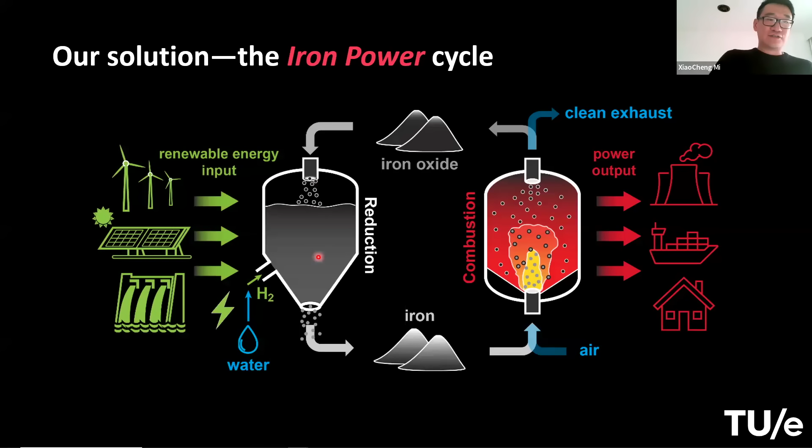So what is this idea about? You can burn iron powder - particles of tens of microns in size. You burn them in air, and the combustion releases heat, which can be used for power generation, electricity generation, or just as heat itself. The combustion doesn't release any CO2 because there's no carbon involved. After combustion, you can recycle the iron oxide powder, also as micron-sized particles, and keep them. You can transport them to somewhere with easy and cheap access to renewable energy input. With this renewable energy input, you can, for example, electrolyze water to generate hydrogen or directly use electricity to reduce iron oxide back to iron. So in this way, you store renewable energy as iron powder and transport it back to the end users. That's the idea.

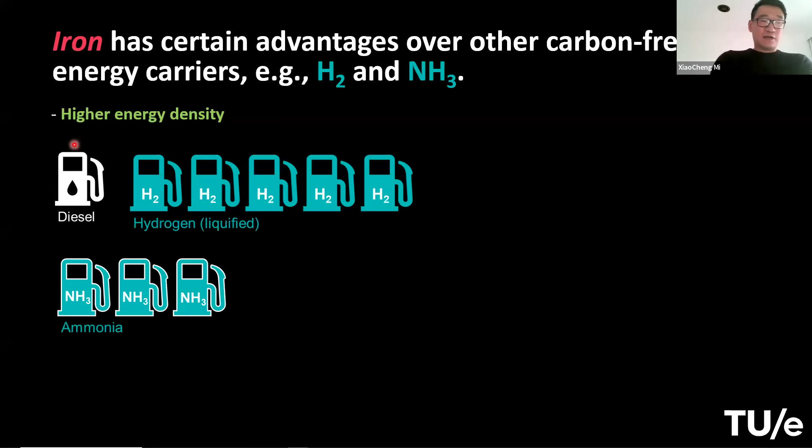Why iron? We see several advantages of iron over other currently developed energy carriers, for example hydrogen and ammonia. First, iron has a high energy density. This schematic shows that if you want to contain a certain amount of energy in one container of diesel, you'd need 5 times more volume of hydrogen, even liquefied compressed hydrogen. Ammonia is better because you pack hydrogen into this molecule with a nitrogen atom, but the volumetric energy density still isn't as good as conventional fossil fuels. Iron has a much better energy density by volume - it takes even less volume than conventional diesel to contain the same amount of energy.

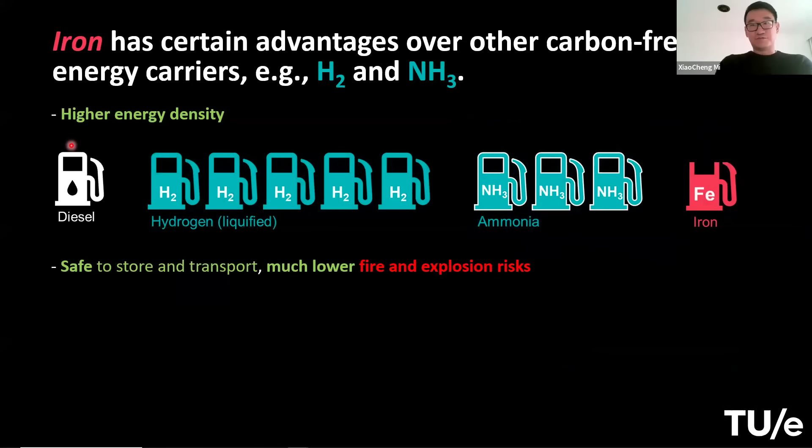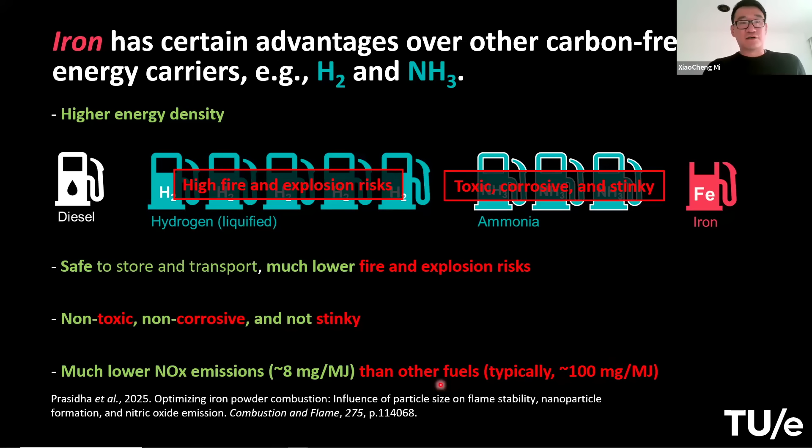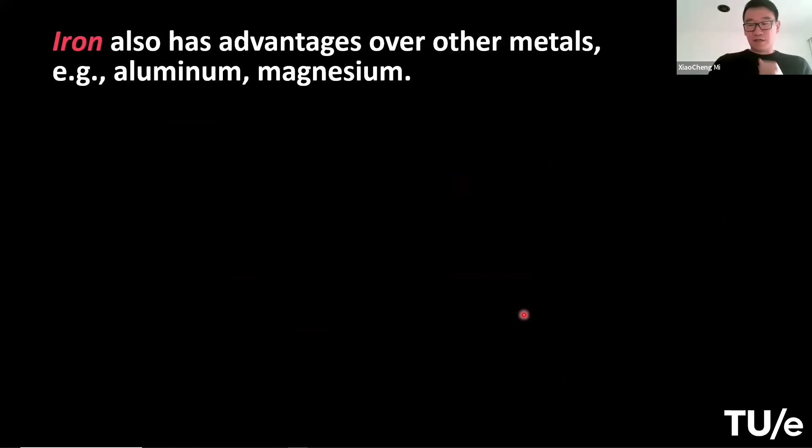And why iron, not other metals? Nowadays, there are also people studying other metals like aluminum or magnesium for energy storage, which are good, but iron has certain advantages.

The first is that iron combustion is non-volatile. This means the combustion temperature of iron is lower than the boiling point of itself and also its oxide. This means during the combustion process, the particle remains in condensed phase, first in solid phase and later in liquid phase.

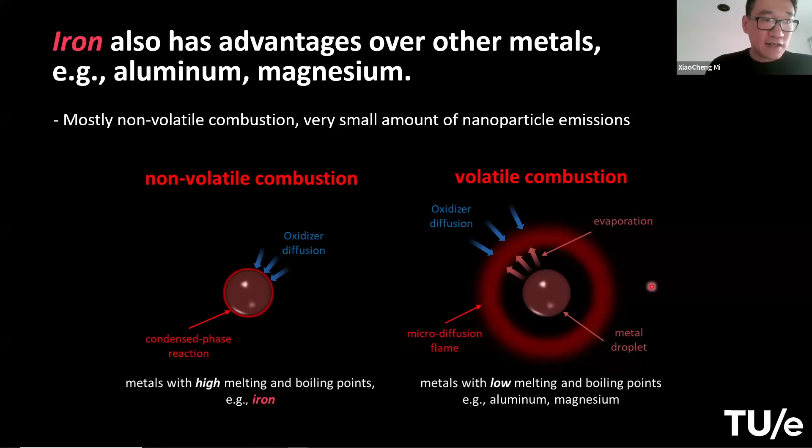Aluminum or magnesium have relatively low melting and boiling points. During combustion, the particle temperature can go above the boiling point, causing a lot of evaporation, with most oxidation happening in vapor phase. This forms a lot of nanoparticles, which are harder to capture and recycle.

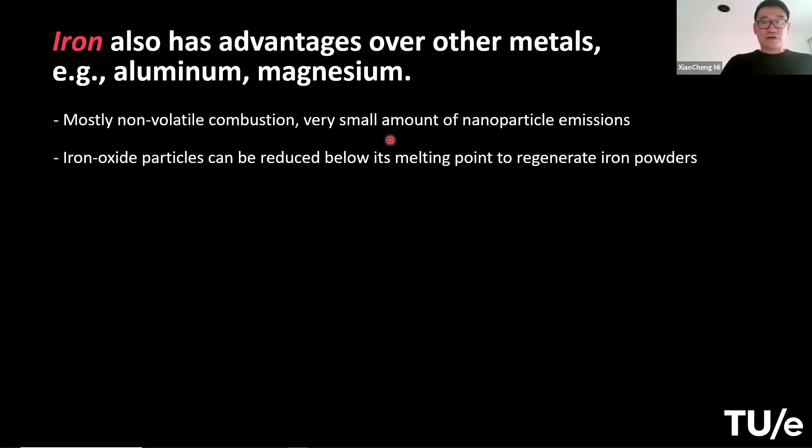So iron has the advantage of non-volatile combustion and small nanoparticle emissions. The other advantage is iron oxide after combustion can be reduced back to iron below the melting point, either in solid phase or in a dissolved solution. These are the two technologies our group is developing.

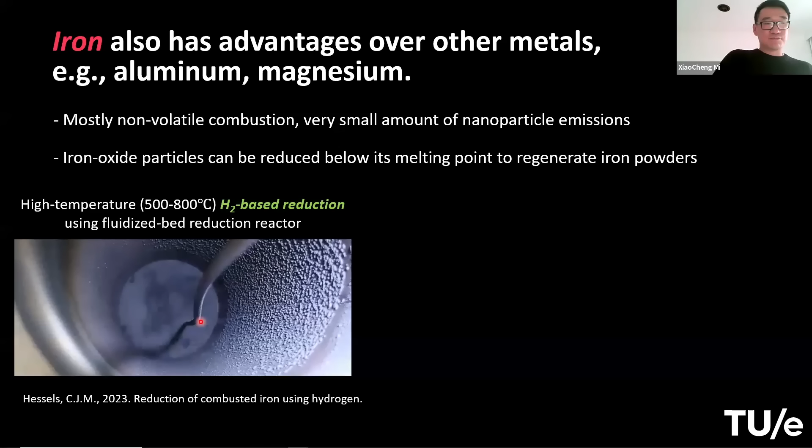One is using a relatively high temperature hydrogen-based reduction using a fluidized bed to reduce iron oxide back to iron. What you're seeing here is a top view of a fluidized bed. This bubbly feature is hydrogen gas passing through the bed. This way, you can reduce iron oxide back to iron.

Another way is direct electrolysis, where we directly use electricity. You apply voltage over an electrolyte, an alkaline solution. You dissolve your iron oxide in there, and the iron can be deposited on the cathode surface. This way, you can achieve much lower temperature electrolysis, even below 110 degrees Celsius.

This may sound a little provocative if you're working on hydrogen or ammonia, but that's not the message I'm trying to send. We can calm down and look at some fascinating phenomena of iron combustion.

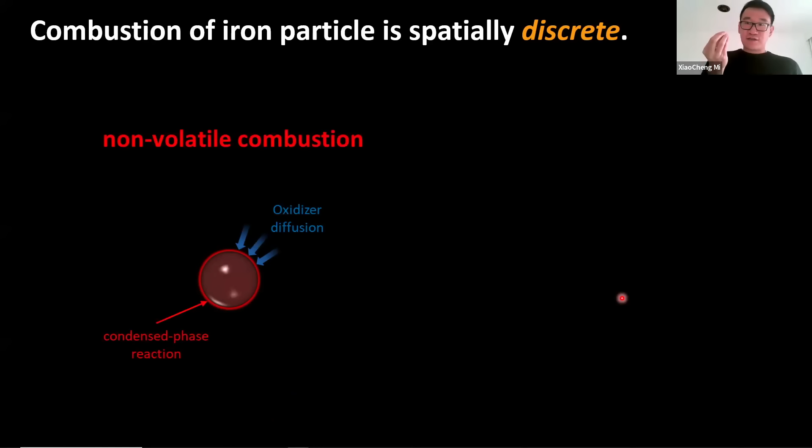The first is discrete combustion, because as I mentioned, iron combustion is non-volatile. This means each particle is like a discrete energy source in space. If one particle releases energy, the heat takes time to propagate to reach its neighbor, and in this way the flame or combustion reaction front can propagate.

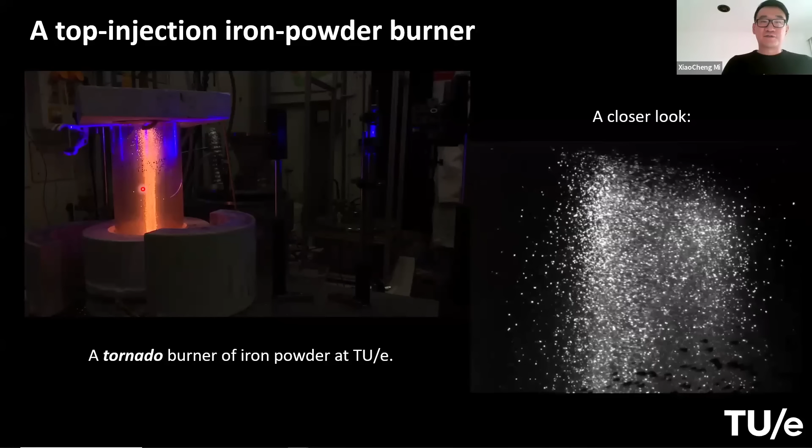The later idea is the top injection iron powder burner. You inject iron powder from the top, and there's a swirl generator on top of this burner, making a swirl inside this cylindrical chamber so the iron powder moves in a tornado motion, which you can see here. This way, the residence time of the iron particles increases, giving them enough time to combust and release heat to ignite the later injected particles, so you can maintain the flame without any other fuels.

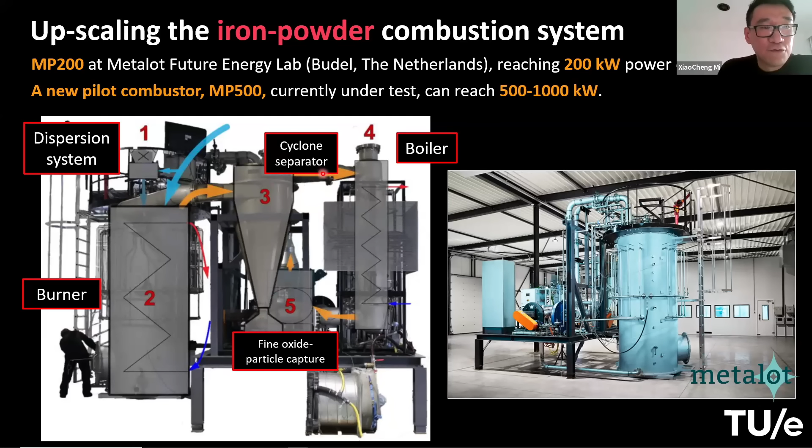Some of the powder will be taken by the flue gas, so you need a secondary separation, the cyclone separator. Due to the centrifugal force inside it, you can further remove iron oxide particles from it. The flue gas then goes through a secondary heat exchanger to extract the heat from it.

And this is a closer look of what is inside this industrial burner. Basically, the particles are injected downward with the gas, with air, combusted, and the particle can settle down on the bottom. There's also a heat exchanging system on the bottom surface to remove heat or keep the particles cool so they do not sinter.

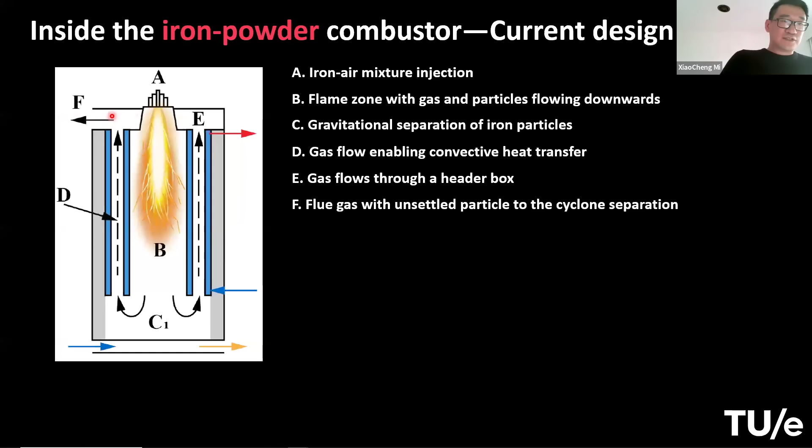And the gas can flow back through these channels where there is a water cooling system. So you heat up, you exchange heat with this system, and the gas goes up, and then you eventually go into this exit into the cyclone.

So far, if you search the literature, there are already quite a few papers on iron combustion published, but the only published document on industrial burners actually recently became available online. It's the thesis of one of our group's PhD students, Niek van Rooij. He published this thesis, which is mainly on industrial scale burners, not the lab size. So if you want to know about the state of the art of this, please have a look at his thesis.

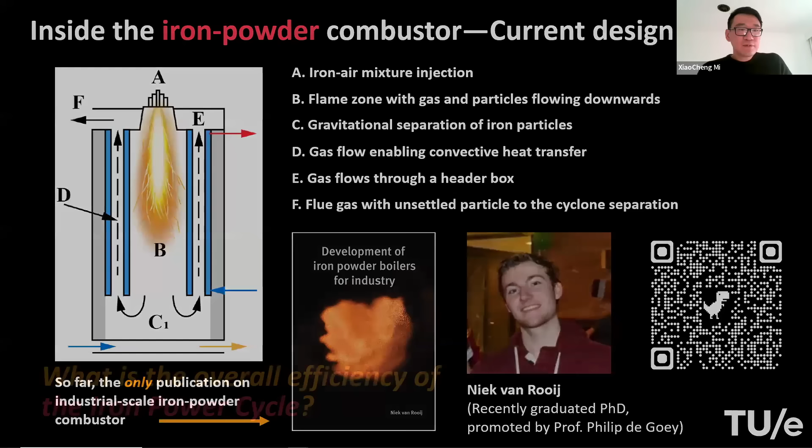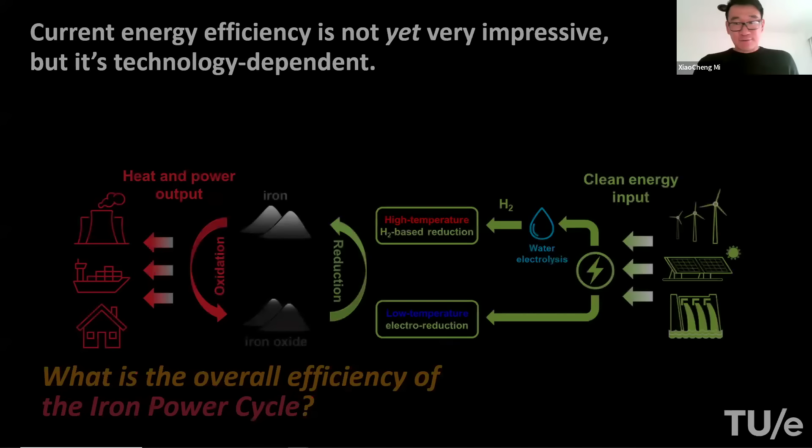So up to this point, you may start to wonder, okay, you said a lot of good things about this iron power cycle. What is the overall energy efficiency, right? To be honest with you, so far this energy efficiency is not yet very impressive, but this is technology dependent.

So let's look at it part by part. For this hydrogen-based high temperature reduction, the energy efficiency is not very good because you need to go through two steps. You need to first do water electrolysis to generate hydrogen, and then you do hydrogen reduction at high temperature, which requires heating up the system. So the electricity to chemical energy stored into iron powder is around 40%.

But this has a relatively higher TRL, meaning we are already working on the upscaling of the technology. There's a better way of directly using electricity, as I mentioned in the previous slide. This one can reach Faraday efficiency, meaning the electricity energy to iron deposition is almost 90%. This is already demonstrated in our lab, but the TRL is relatively low because we are still working on the lab scale reactor, not at the industrial scale.

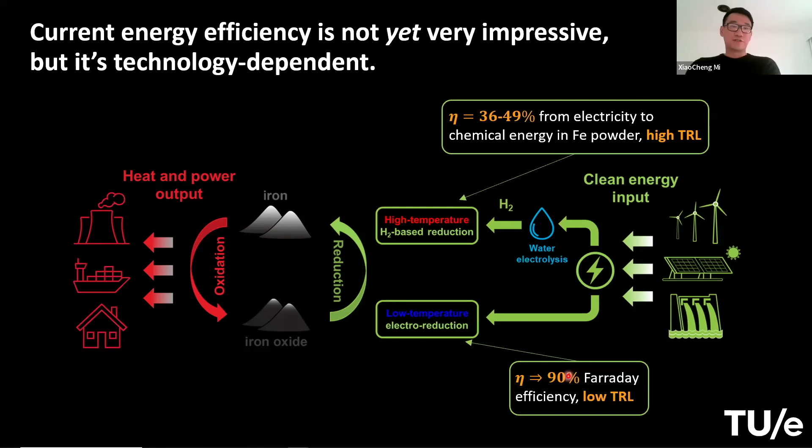But as a combustion scientist, I care about the combustion side. Theoretically, if you burn a fuel, you can fully burn it—it can all go into heat. Thermodynamics allows us to do that. However, as you can find in Niek's PhD thesis, so far, depending on the conditions, the iron chemical energy to heat efficiency varies from 50 to 80%. Not ideal, but theoretically we should be able to extract 100% of this amount of energy as heat.

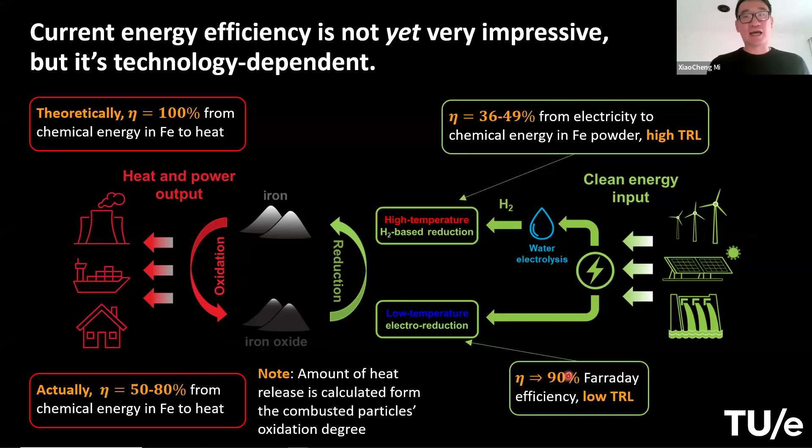Please note this efficiency is calculated based on the oxidation degree of the material we collect after combustion, so the lack of efficiency is not due to the technology of the heat exchanger. This makes us wonder why the oxidation degree so far is so low in this technology, and how can we improve it? As scientists, maybe not so engineering-minded, I want to think about the fundamentals.

So can all the particles injected into the chamber be ignited? And if the particle can be ignited, can they burn out? Can they reach the maximum oxidation degree or not? Let's first think about the first question.

To investigate that, we did some tests with our lab scale tornado burner, and this time we use relatively large particles. The particle size you can see from this SEM image is around 100 microns, and the particles we use are irregular. These are some magnetite ores that we took from a mining company, and then we use hydrogen to reduce them to metallic iron. This is a closer look—you see the iron particle is not smooth, not spherical, and also looks porous because of the hydrogen reduction.

If you burn these particles and the particle can be ignited successfully, it will go into liquid phase. Because of surface tension in liquid phase, the product particle will look very spherical, like this one. But you can see in the product particles, a lot of particles are still irregular, which is overall similar to the unignited, uncombusted particles. This means that in these combusted particles, there is still a large portion that fail to be ignited because they look irregular - they have never been into liquid phase.

This is consistent with the X-ray diffraction measurement. You see a lot of irregular particles, and indeed, there is still a large portion of iron remaining in the product particles.

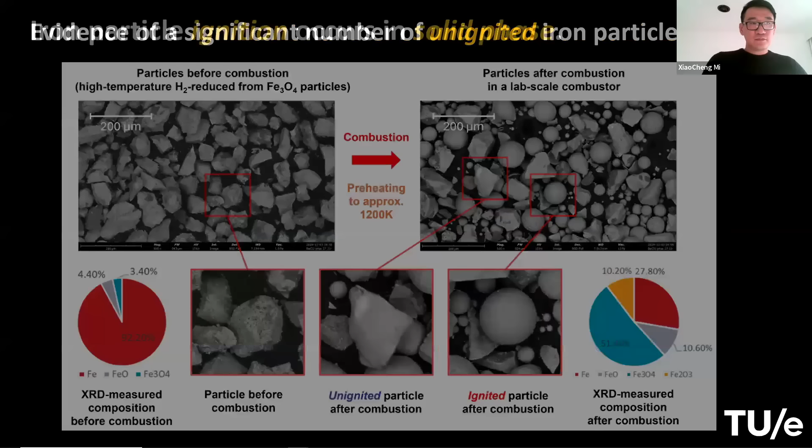This leads us to the thought that this ignition phenomena must occur in solid phase. The critical phenomena depends on the solid phase oxidation. Then we need to look at some basics about solid phase iron oxidation.

In solid phase, iron can be oxidized to 3 different species. The lowest one is FeO, or what we call wuestite. The intermediate one is magnetite. And then the most oxidized form is hematite, Fe2O3.

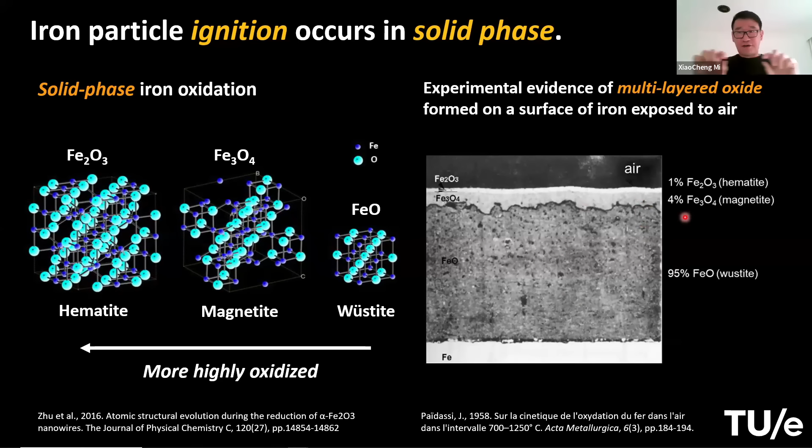This is a picture taken from a metallurgy study back in the 1950s. It shows the oxide layer that grows on top of an iron surface, exposed to air, which is an oxidizing gas. You see that nearly 95% of this oxide layer is wuestite, FeO. Then there is a thinner layer of magnetite, and a very, very thin layer on top, which is Fe2O3, hematite.

Because of this multi-layer formation of iron oxide, its growth rate actually depends on the iron ion diffusion rate through the oxide layer. So how fast it grows depends on how fast iron ions, Fe2-plus or Fe3-plus, transport across these two thicker layers. Of course, the thickest one, or the most dominating one, is the FeO layer.

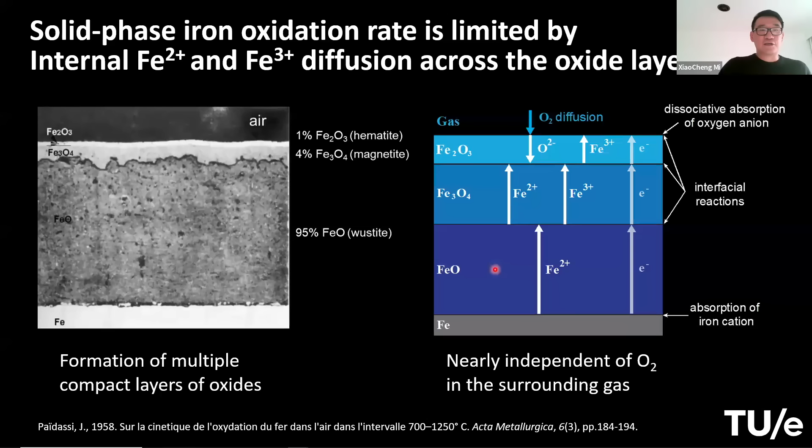If this internal diffusion is the rate limiting mechanism, then we can actually come up with a reaction rate model to describe it. The diffusion is mainly described by Fick's law, which we also know from heat and mass transfer that we study for gas phase combustion.

This Fick's law depends on the difference of concentration over the thickness of the oxide layer. Basically, this is the gradient of the concentration of the ion across the oxide layer. So it depends on the difference and inversely depends on the thickness of the oxide layer. The growth rate of the oxide layer depends on the diffusivity times area, and the gradient of concentration. This can be written in this form.

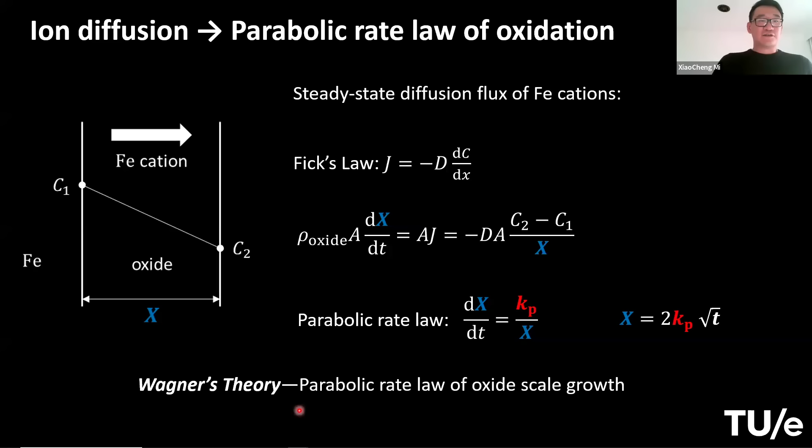The derivative of oxide layer thickness with respect to time equals some parabolic rate law constant Kp divided by the thickness of the oxide layer. This Kp is actually based on the diffusivity of the ion across this oxide layer. This is known as Wagner's theory, which gives rise to the parabolic rate law of oxide layer growth.

This Kp can be measured by fitting straight lines to the oxide layer growth over time at different temperatures. It follows a certain Arrhenius form, which has the activation energy and also some pre-exponential factor, similar to gas phase reaction kinetics, because this is an activated process.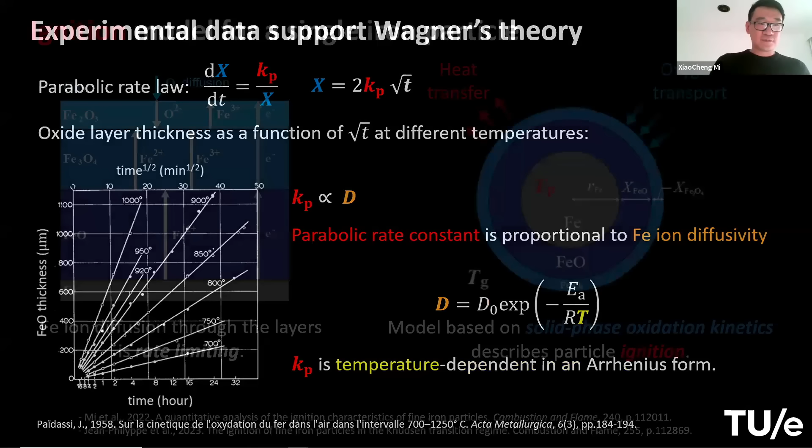By knowing such an oxidation rate in solid phase, we can actually build a model to simulate the ignition process of an iron particle. We can build such a model by assuming this oxide layer is wrapping around a spherical particle. The growth rate depends on the parabolic rate law that we can get from the literature, using experimental data to calibrate that. Then we can build a mass and heat balance model for this spherical particle system.

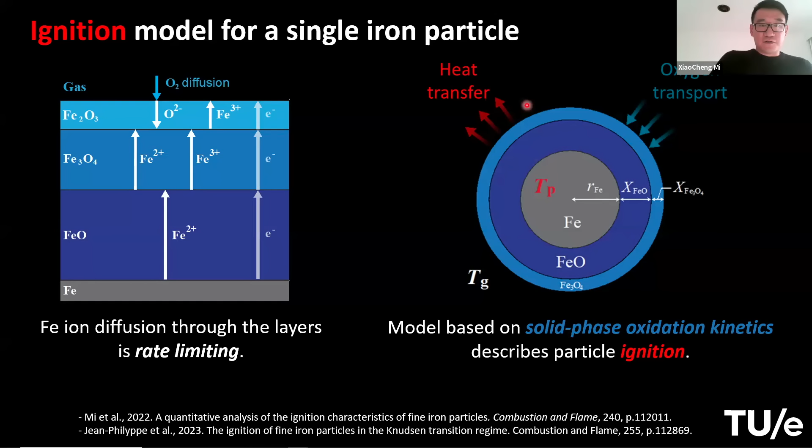If you change your gas temperature from a small value and gradually increase it beyond some critical value, you can trigger particle thermal runaway. This minimum temperature of the gas that can trigger particle thermal runaway is determined as the ignition temperature. So by running this simulation, running the model in multiple ways with different gas temperatures, we can determine ignition temperature theoretically.

Here are some results. This is the ignition temperature as a function of particle size. The different curves show the result for different initial oxide layer thickness. You can see that the ignition temperature is highly dependent on the initial oxide thickness. With a relatively large initial thickness, it requires a higher ignition temperature to trigger thermal runaway. Radiative heat transfer to the surrounding doesn't have a very major effect on the ignition temperature.

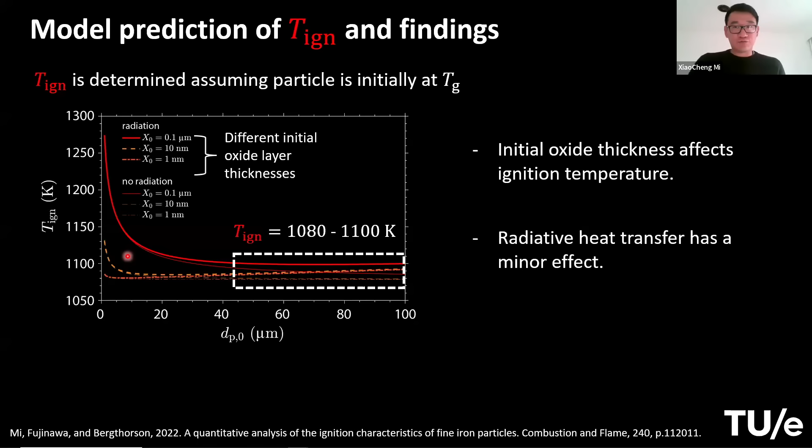In these cases, we assume that the particle's initial temperature is the same as the gas temperature. So if the particle is injected into the chamber at room temperature, it would require a higher ignition temperature, which I'm going to show later in the slide.

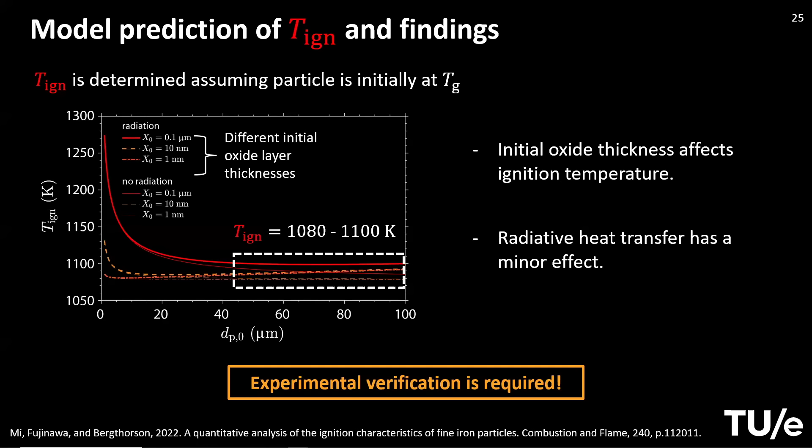Okay, sorry. Okay, yeah, no worries.

Okay, I will continue. So this is a theoretical prediction, and we need experimental verification.

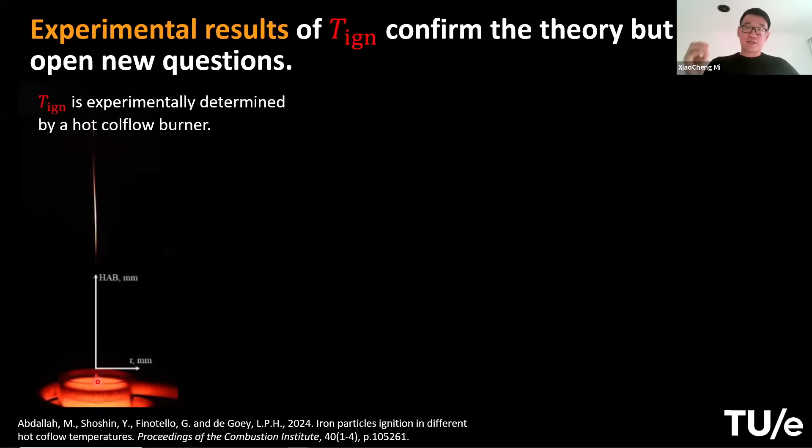So what I'm showing here on the left is an experiment also done in our group at TU Eindhoven. It's a single particle ignition experiment. You can inject single particles into this middle tube, which is a very thin ceramic tube. Around it, this larger tube is a hot coflow, so you can use electric heating elements to heat up the coflow gas that has oxygen in there, and you can control the temperature of the coflow gas. In this way, you can determine the particle's ignition probability at different temperatures.

And here is the result. What you are measuring is you count the number of particles you observe, and if it's ignited, you count it as ignition. After measuring many particles, you get this ignition percentage as a function of coflow temperature. You see this ignition percentage goes from nearly 0 to nearly 100% between 700 and 900 degrees Celsius, over this 200-degree range.

This range seems to envelope what the theoretical prediction is. In this case, I'm comparing it to the case where I assume the particle initially has the same temperature as the gas. This is because the particles are carried with inert gas in this central tube, and before it encounters oxygen, it has already been heated to about the same temperature as the coflow.

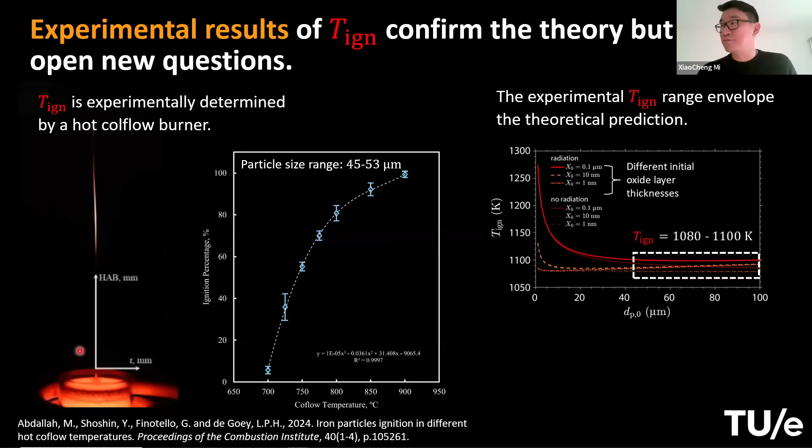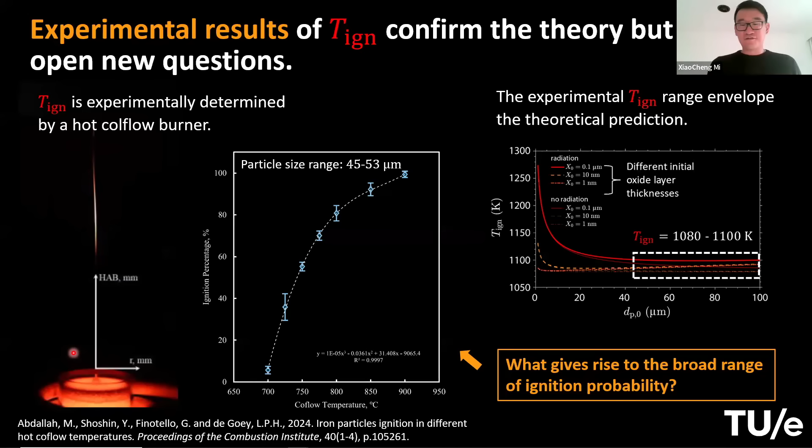But the thing is, theoretically it only tells us there's only one single value of ignition temperature, but experimentally it tells you a large range. So what gave rise to this range of probability? There are multiple factors that we are considering.

First of all, the particles are not spherical, they're irregular and could also be partly porous. Also the particle may contain impurities, which changes its chemical and thermodynamic properties. Of course, the particle may have different initial oxide layer thicknesses.

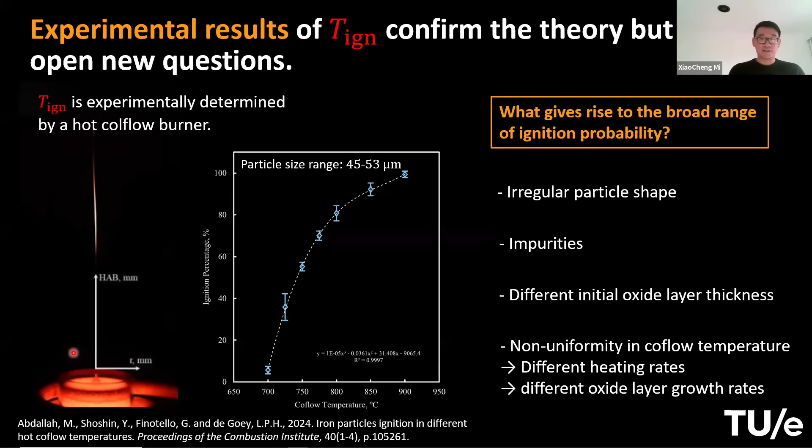And the last one, maybe the most relevant one to the larger scale combustor, is that the coflow heating around the particle might be different. So the particle may experience different heating processes as it goes across this flow field. This I will elaborate further.

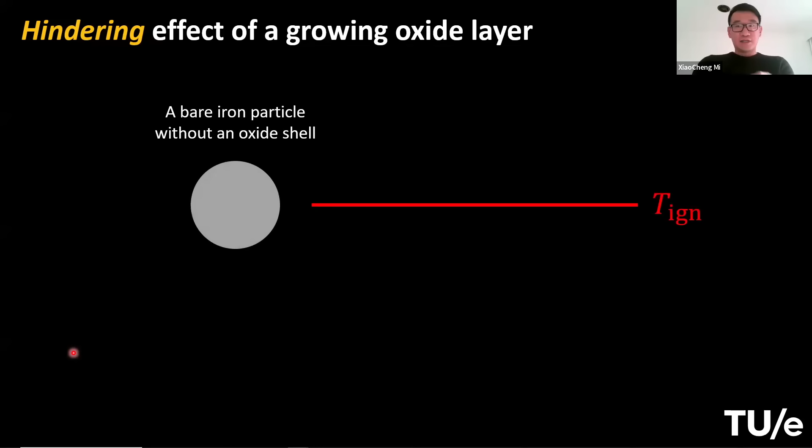So if the particle experiences a different heating process, it may have the following result. Let's say we consider one particle without any oxide layer, and there is a certain ignition temperature that we predict with theory. If the particle encounters a gas temperature greater than this critical ignition temperature, then thermal runaway can happen, and as shown before, the particle can be ignited and burn in liquid phase.

But if the particle encounters a gas that is below this critical value, there's no ignition. And if you keep the particle at this gas temperature, which is already very high but not enough to ignite, the particle can still oxidize, so it will build up an oxide layer.

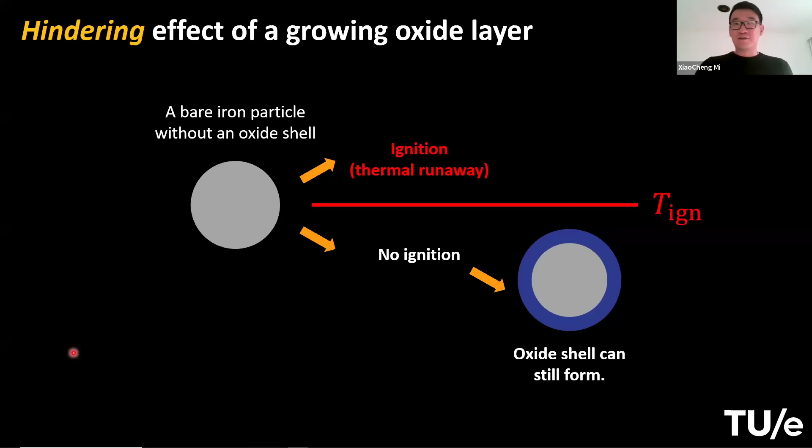And if you recall what I said before, the reaction rate is inversely proportional to the oxide layer thickness. So as the particle builds up a thicker and thicker oxide layer, it becomes even harder to ignite further. After it builds up this thick oxide layer, even if you bring it above the initially required ignition temperature, ignition may not happen.

So there are some studies, experimental and theoretical, on the ignition temperature, but not much study has been done on the effect of the heating rate on the ignition temperature.

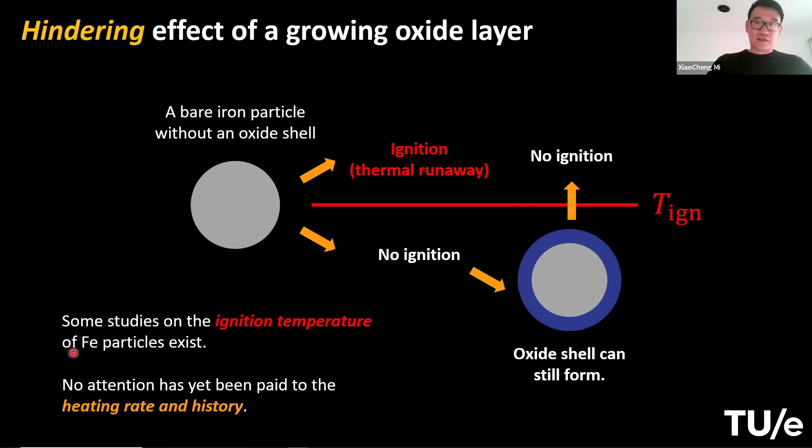I recently did a theoretical analysis, just a thought experiment. Let's say you have a 50 micron particle, initially at room temperature, and then you introduce that to air at 1100 K, which is actually below the critical ignition temperature. So the particle won't be able to ignite.

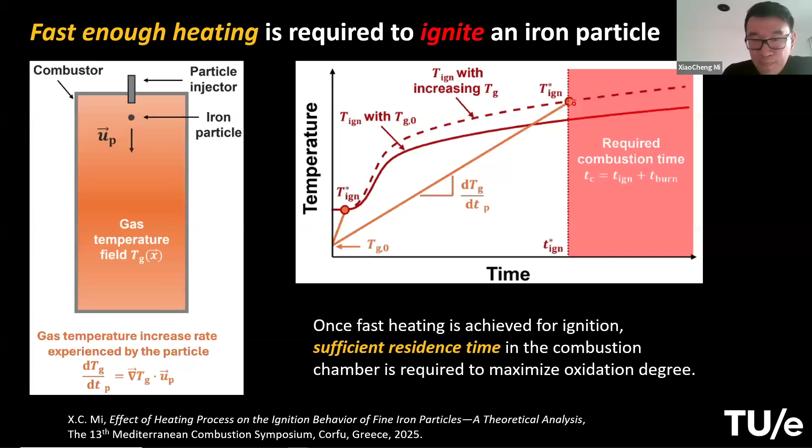So the conclusion is that fast heating is required to achieve ignition. After that, you also need sufficient residence time in the combustion chamber to make sure the particle can complete its oxidation, which is the topic I'm going to talk about a bit later.

We have the hypothesis that this larger pore size can facilitate oxygen penetration into the interior of the particle. In such a way, we increase the reactive surface area that can lead to a lower ignition temperature required. But we are right now doing experimental investigation to verify our hypothesis.

Okay, so that's about the first question - how can we ignite the particles? The second question is, if the particle can be ignited, can we make sure it can fully burn out within the combustion chamber? To know this, we need to think about the liquid phase combustion after ignition.

And this is some basic understanding. We burn these iron particles in our lab burner, and we can collect the product and do some further material characterizations.

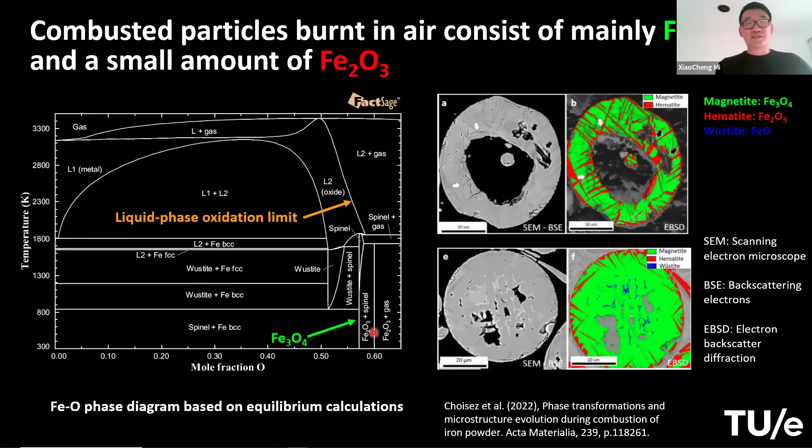And that is why we are seeing Fe3O4 as the main product after combustion. You can see this boundary actually goes a little bit beyond Fe3O4, which means once it cools down, it actually contains more oxygen than the solid phase can hold. This is why we see this kind of cavities formed, because the oxygen needs to be repelled out of it. Only in solid phase, if you keep it warm enough and supply oxygen, it can further oxidize to hematite, the highest oxide product.

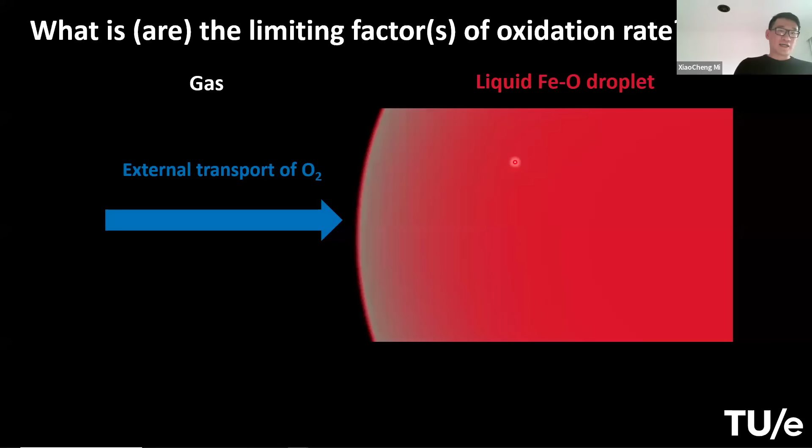And then in liquid phase, we consider the particle might be limited by a few factors, so the oxidation rate is governed by the interplay among these factors. The first is the boundary layer external diffusion of oxygen from the bulk gas to the iron particle surface. Then the surface chemisorption is the second process. And inside the particle, there is also internal transport of Fe and O ions. And of course, there's a reaction between Fe and oxygen.

But we know this oxygen, because in liquid phase they are in ion form, so this reaction is very fast. Also, we assume at this very high temperature, the internal transport and the surface chemisorption can be also very fast. So in the very first model that we have for liquid phase iron combustion, we just assume that external diffusion is the only rate limiting factor.

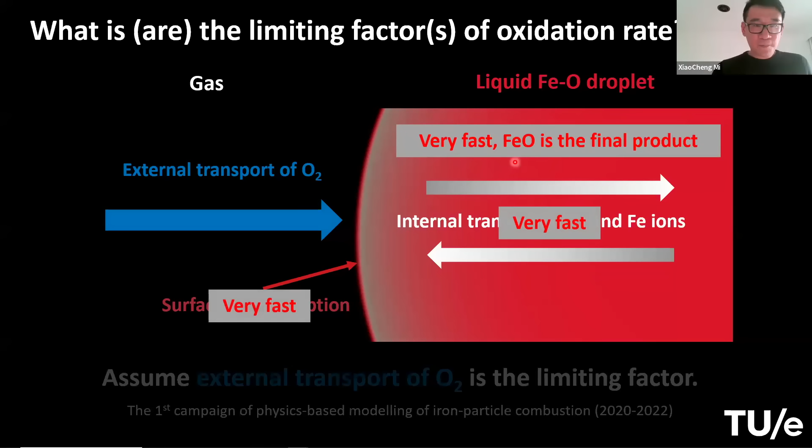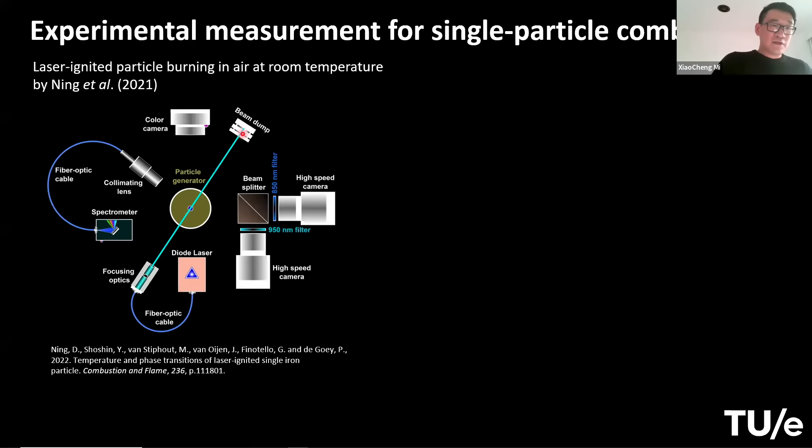And how well this model does, let's see some results. We need to compare the results with some experimental measurement. One experimental measurement is done by our former PhD student Daoguan Ning, using laser ignited particle burning in air at room temperature. This is the top view of the setup. The particle is injected in the center of this setup, ignited by laser, and the temperature is monitored by this two-color pyrometry.

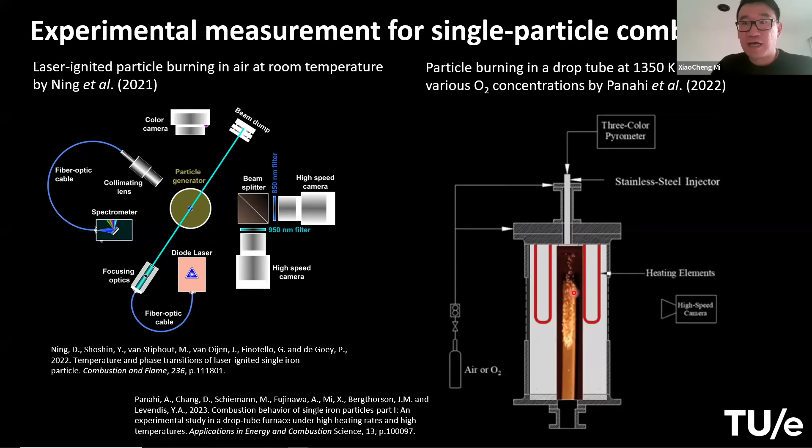And an independent experimental study was done by Panahi in the US. They use this drop tube reactor. The particles are injected from the top going downward. The gas is already hot enough to ignite the particle due to this heating element. And the pyrometry can be looking down from the top to monitor the gas and particle temperature history.

Then the heat and mass transfer in the boundary layer is governed in the continuum regime. On the left, you see this boundary resolved model done by Leon Thijs using COMSOL, compared with the temperature history measured from this laser ignited particle case. You see the overall trend matches pretty well. That means we are able to predict the temperature of the particle and also the time scale of the combustion process.

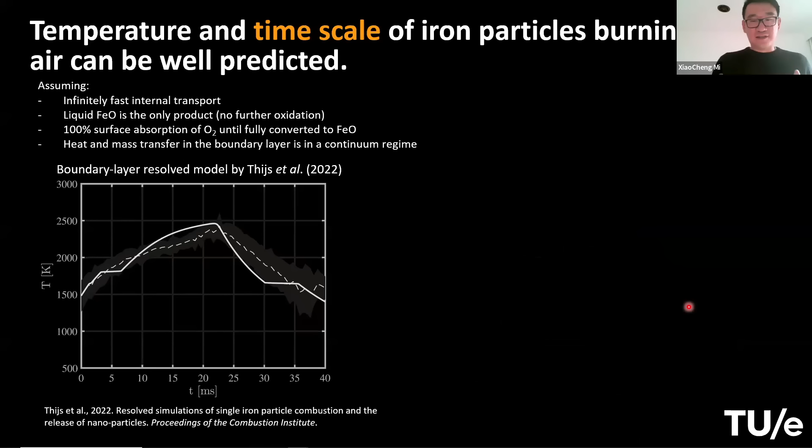And then later, by Aki Fujinawa, we developed this zero-dimensional, even simpler iron particle combustion model, which also matches the result very well, both in time scale and temperature. Of course, at higher oxygen concentrations, the results so far are not yet perfect. For more details, you can look into Leon Thijs' PhD thesis. He looks into what are the effects and how to go beyond these assumptions. So here I won't elaborate on this point.

But we can see that the iron particle combustion times are actually very short. From Dao Guanning's result, if we burn iron in air at 21% oxygen, the overall combustion time is on the order of tens of milliseconds for these tens of micron-sized particles.

And if you extend this rate law to larger particles up to 100 microns, which is the range of practical iron particles in industrial burners, the combustion time extends to maybe about 100 to 150, 160 milliseconds, which is also not very long.

And also, once the particle can be ignited, as demonstrated in these laser ignited experiments, the particle can sustain its combustion even in room temperature gas. So the particle can very hardly be quenched after ignition.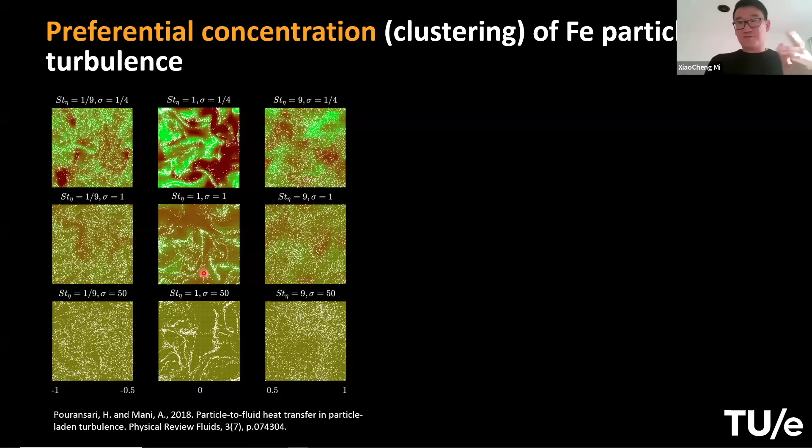But if the particle Stokes number occurs in this intermediate regime, some particles will follow certain eddies in the turbulence and form this clustering phenomenon. This is uniquely important for iron dust combustion. The first reason is iron has a high density, so for the same size it has higher inertia, higher mass.

The second reason, as I mentioned before, is that iron combustion is non-volatile. That means over the whole course of its combustion it remains in the condensed phase. Unlike coal or biomass or other volatile solid fuels, where initially it may be influenced by such phenomena, most of the heat release there comes from gas phase reaction, which is no longer affected by preferential concentration.

So this preferential concentration may have certain effects on iron particle combustion. One thing is that locally the particle can be highly concentrated, so that particles can collide and form agglomeration.

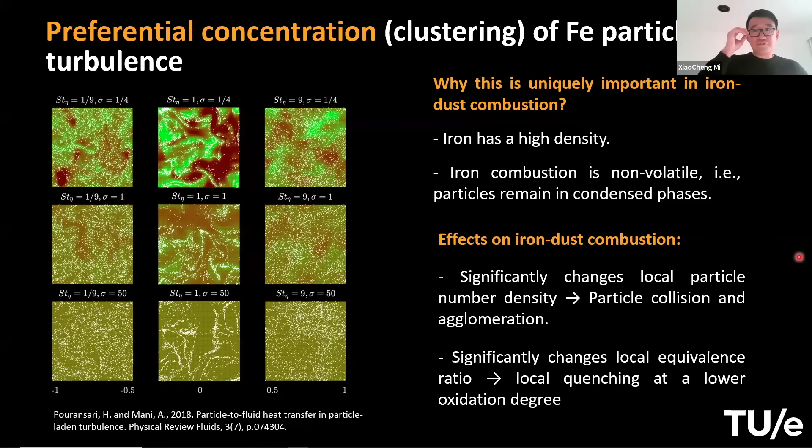The second effect is also because of this localized concentration. Locally you can have a very fuel-rich region, and the iron particles may deplete the oxygen available there locally. This can lead to quenching or just a lower oxidation degree. Whether this may happen in reality or not, we don't have any in situ or direct measurement yet.

So we see this clustering can indeed significantly elongate combustion time, but this effect is not significant enough to increase the combustion time by more than one order of magnitude. It's just several times longer.

Okay, so we come back to the questions that we asked before. First of all, why is the oxidation degree so low?

What we see from our lab scale burner and also the material characterization shows that many particles fail to be ignited. Theoretically, we showed this failure of ignition is due to the hindering effect of the growth of the oxide layer. It's very unlikely this low oxidation degree is due to insufficient residence time, because after ignition the combustion time is very short. Turbulence-caused clustering can elongate the combustion time a little, but not by an order of magnitude. So it's still on the order of tens to maybe 100 milliseconds, which is very short.

So what we can improve, I think the main thing we need to do is make sure the ignition rate is as high as possible.

Without telling you too much about the patentable content, the scientific message is to try to ignite the particle via fast heating, before the oxide layer can form, or find a way to heat the particle in an inert way without letting it oxidize. Once they are hot, you can inject them into the oxidizing environment.

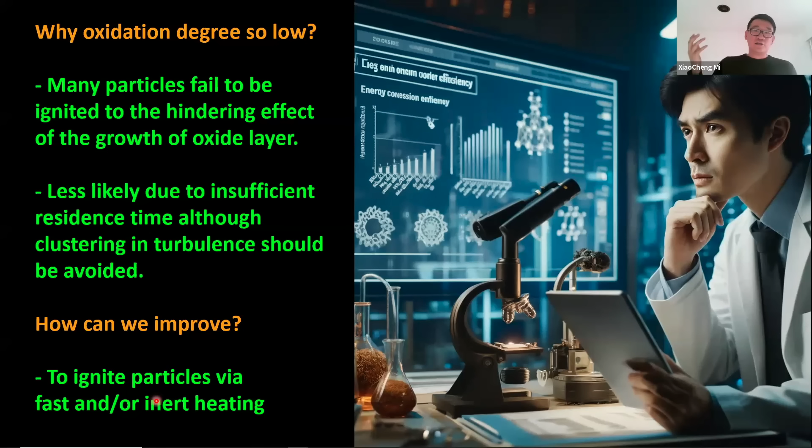So these are the key features that we think we can implement in our combustor to achieve 100% energy to heat efficiency. That's the story I wanted to tell today.

There's already quite a lot of publication on this, and what I can cover today is a minimum of it. I just wanted to make it a compact story. I also didn't talk much about the economic side of this idea because I'm not an economist and I don't pretend to be one. So you can scan this QR code and find a collection of papers on the techno-economic analysis of iron powder.

Thank you all very much for your attention, and I would like to answer your questions.

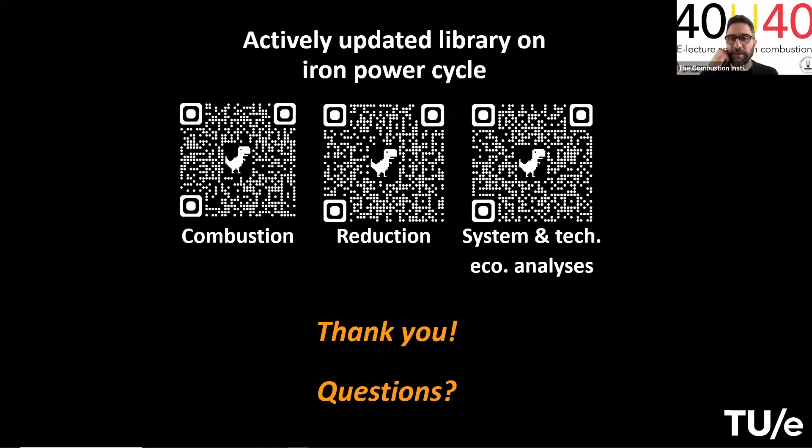All right, yeah, thank you to the organizers, and thank you, XiaoCheng, for the great presentation. I have a couple of questions, and I'd like to start with when you were talking about the problem in ignition, the theoretical results you presented, where a particle fails to ignite and then forms a shell or a layer of oxide around the particle. Do you have experimental evidence of this?

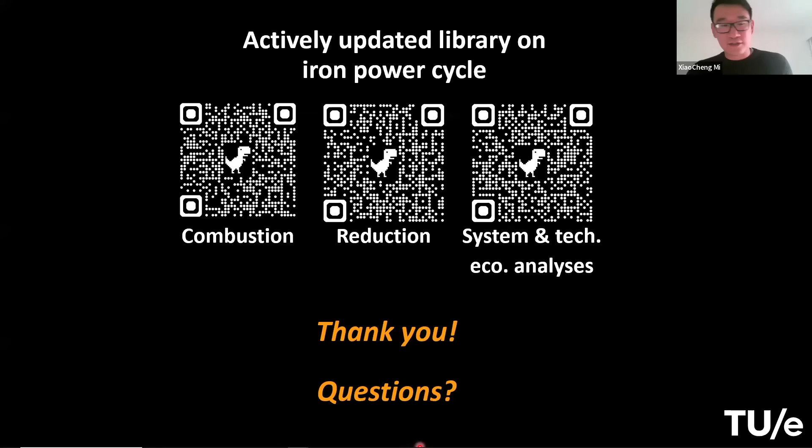This video - the question is not to challenge you, but so I started working on this recently at Nottingham Trent University in the UK. At low oxygen concentration, I got some particles burned, and others formed that layer. So I've been able to look at this after doing the cross section and looking at the EDS. So this confirms what I currently found - great, well actually you confirm my hypothesis.

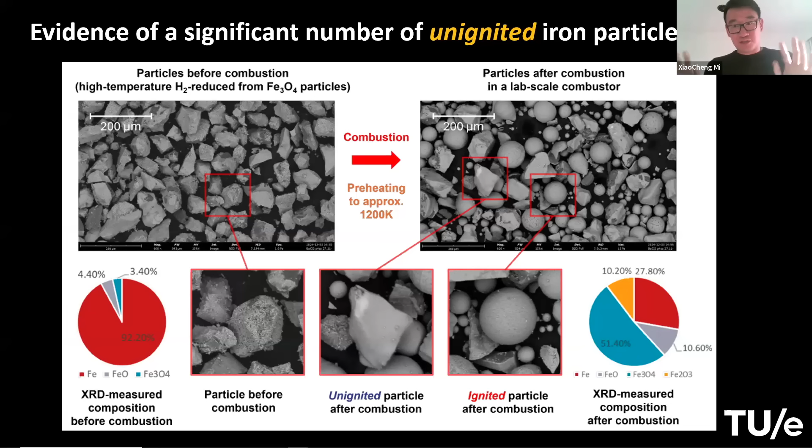Oh, you mean, because I think you are talking about the two different pores that I mentioned. The pores from reduction, for example this one I'm showing here, that's in the solid phase of iron particles produced by reduction, by hydrogen reduction, because hydrogen reduction basically removes oxygen from it. So the molar volume of metallic iron compared to the molar volume of oxide, across the stoichiometric ratio, is less, so that after reduction you always end up with a porous structure using hydrogen.

But what we are seeing is the pore sizes are different at different temperatures of reduction. So this is one porous structure that I mentioned, but I think what you are talking about later is the cavity or the pores that occur after combustion. I meant that one - in my particles, I already have these in the raw particles, pure iron, and when I burn it, I still get these large pores.

So I was wondering if I do one or two cycles of reduction, whether this will go away or make it worse. Actually, it does go away every time you combust it, because once you ignite it, when it goes into liquid phase, the surface tension will make it spherical or compact, as a compact sphere anyway.

But this is not for one, most of the particles - some of the particles go spherical, but when you do the cross section, you're going to find some of these inside, they may not appear at the surface. In our theory right now, I think it will always be there in some particles, because in liquid phase, basically you can oxidize it beyond the stoichiometry of Fe3O4, and after you solidify it, immediately it can only form the oxide or stay in the lattice form of Fe3O4.